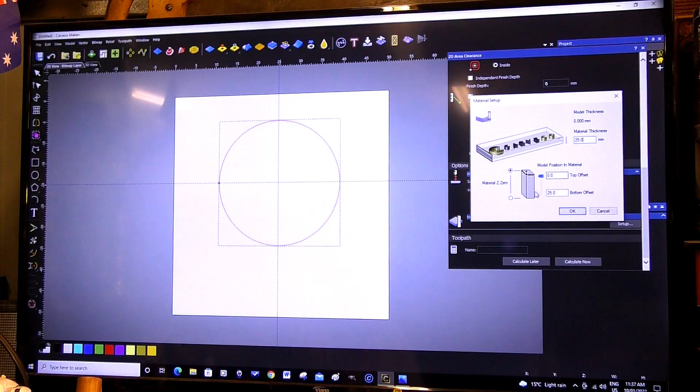Right, setup. Now here, this is where we tell Carveco how thick the material is. So it's 25 millimeters. That's all fine, so we're going to OK that.

So I apply. This is now. I'm going to name the toolpath. Now I abbreviate everything, so I just need something that's going to indicate to me or remind me, or I can recognize it in the G-code listing when this is saved. And that's indicated to me that that's been calculated, and that is the toolpath.

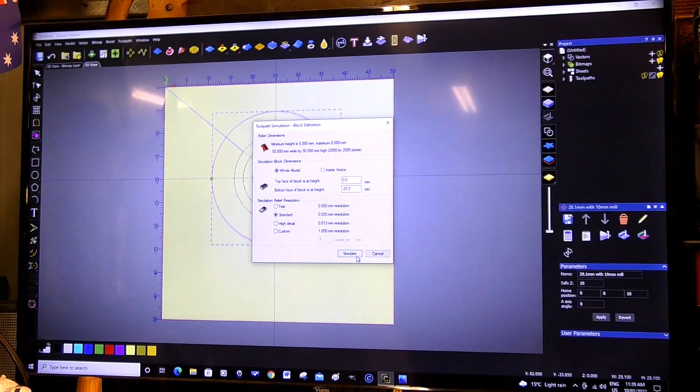So now what we're going to do is we're going to cross out of that. I'm going to come now to simulation. Standard simulation and simulate.

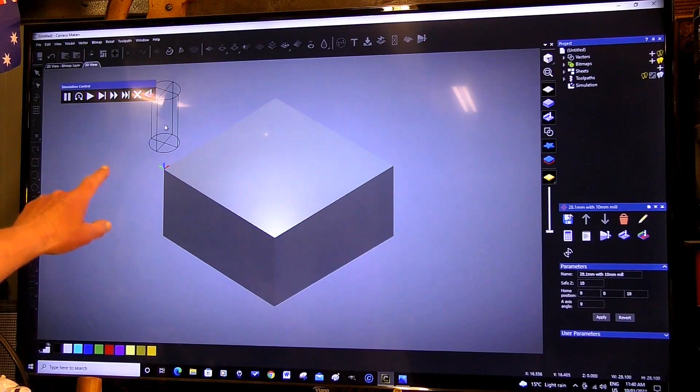Okay, so what I did just now, I went up to this view cube, for want of a better word. You can change the view. So you want an isometric view, which is that one. So now we can see this, the mill. This is just the representation of a milling tool. Come in here and machine this. So we're going to play.

Okay, so there is our hole bored out in the exact position where we want it. Now, a couple of things to mention here. I've had a few people ask me how to turn the rulers on and off. Well, you just come up here to View. You come down here to Show Rulers. Touch that and it disappears.

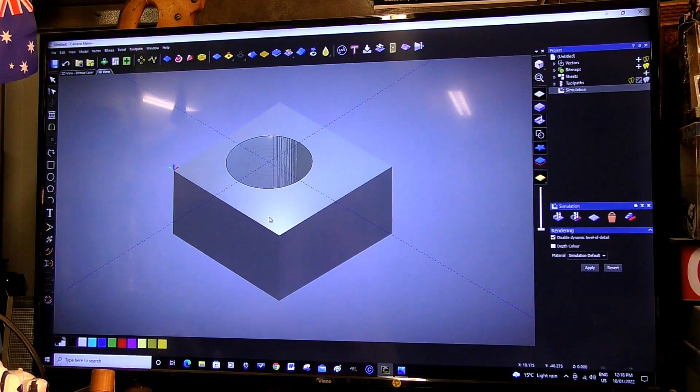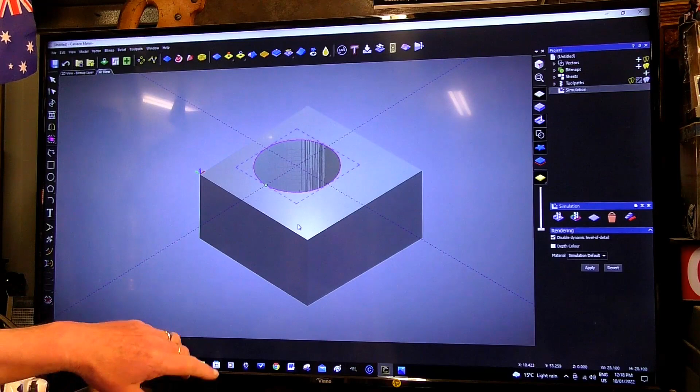And also, you can change the view here to top view, isometric view. But when you go on it, you can move it bodily. And a lot of people are asking me where the twiddle tool is. How do I maneuver this around in 3D space? Well, you come up here to View, and there's the twiddle tool there. So now you come on here, left click, and you can move it around in 3D space. Totally fine.

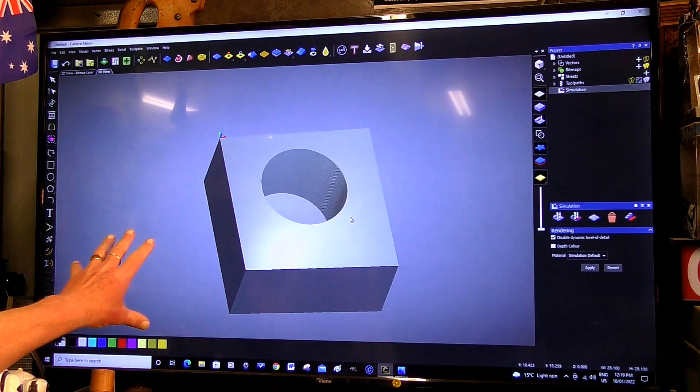And you can also turn those lines off by just touching that there, and turn them on and off. And you can move it around. Another thing people are asking me is how to change the material. Well, this is set up as aluminium at the moment, which is what we're actually dealing with. But if you just touch the simulation bar up there, then you can come down here and you can select whatever you want.

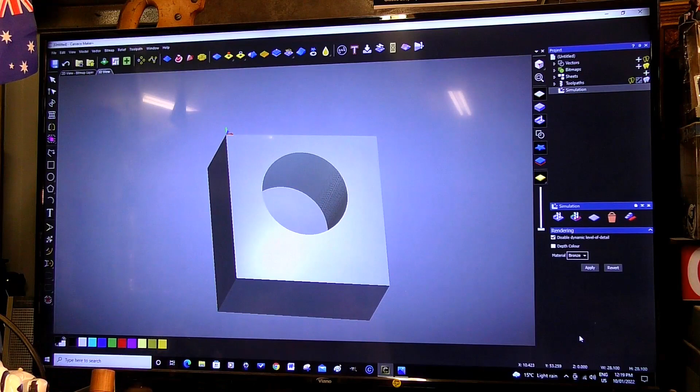I actually like, if I can see it, where is it? Beech, where's bronze? There's bronze. I like bronze. I think it looks rather nice. Apply. Look at that. Nice shiny piece of bronze. Oh God, I suppose you could call it gold as well. So that is how to change your material if you want to.

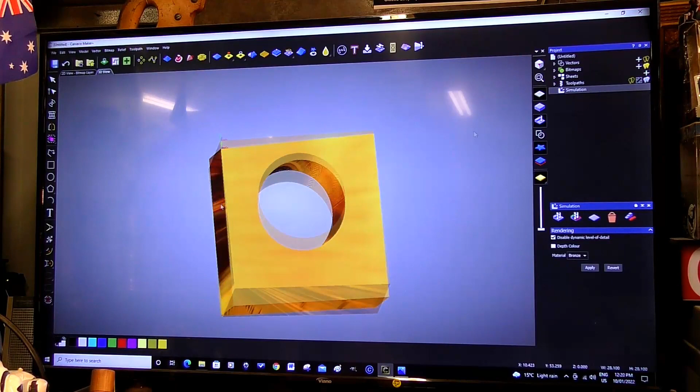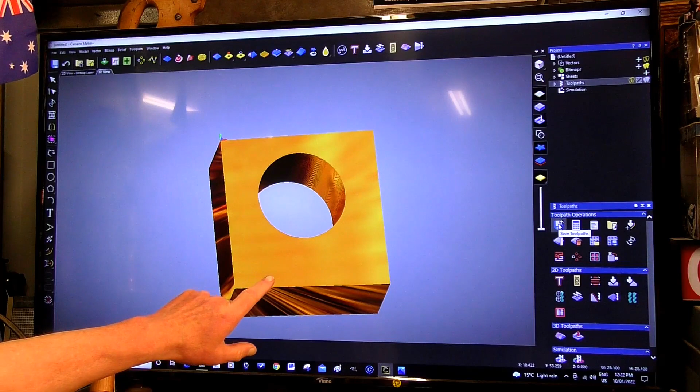A number of people have asked me how to save as well. So you come up here to Tool Paths. You notice I just clicked on Tool Paths and it brings up more information on what you want to do. So we just come here to the floppy disk. Quite a few of you probably won't know what a floppy disk is, but it's just a means of saving data. And this is exactly what we want to save in J. I think it's J. Let's just check. It is.

We'll rename that. So it's 28.1 millimeter with a 10 millimeter mill.

This is another thing too. I always use a G-code millimeter tap. It's a good all-rounder. The SMC controller that I use sometimes understands that perfectly. Mach 3, Mach 4 understands it, so that's what I use. So we'll save that, and basically that's done. So that's how to use any of the Carveco programs to construct a part.